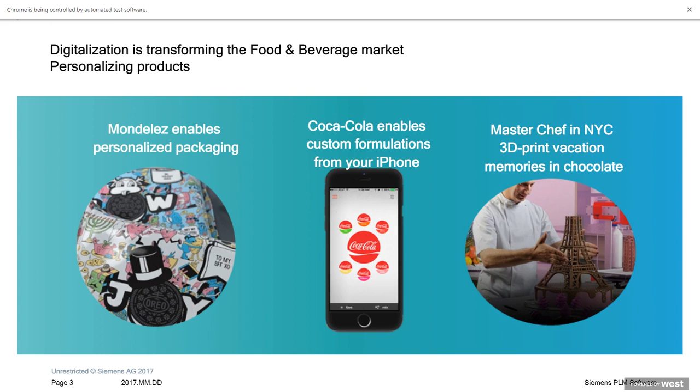And that includes the food industry. So when we look at how digitalization is transforming things, a few different examples here: personalized packaging, the Coca-Cola Freestyle app enables you to get on your smartphone and create your own flavors, and then all the way to a master chef in New York City using advanced manufacturing techniques like 3D printing to build chocolate creations for people. So you can see the digitalization trend is here. It's impacting the way our products are produced and brought to market, and you as engineers have got to accommodate that in your day-to-day lives in order to be successful.

And it's not all a positive change. According to Accenture, digitalization is the main reason that just over half the companies in the Fortune 500 have disappeared since the year 2000. If you think about that trend, that's really astounding. So half the companies are either out of business, they've been acquired, or they've dropped out of the Fortune 500 because of the impact of digitalization. And so in order to survive that disruption and really thrive in this era, there's a lot of change going on, and the change comes really fast.

We believe that incumbents need to become digital enterprises. That's more than just adopting CAD or adopting a simulation tool. That's really about taking digitalization and tying it through your entire business. So if I look at this, that starts getting into the concept of a digital twin and the digital thread.

The digital twin is basically a virtual representation of the product, and it incorporates a kind of single source of truth that you can look at, that goes all the way from the ideation stage at the very beginning of the product life cycle through into realization where you're manufacturing the product, and out into utilization where the customer is using the product out in the field.

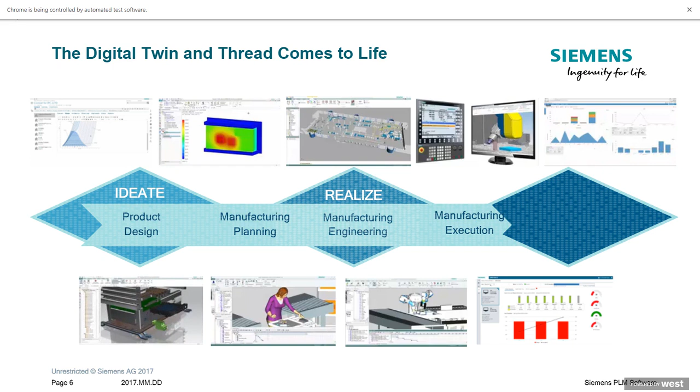And so if we can create a digital twin and tie that through the entire process, now we can do things like define product requirements digitally, build our design and simulate so that those requirements are met, then come in and build a manufacturing operation, again, on the computer. And now we can do this whole process efficiently, so when we move to the real world, we're guaranteed, or at least highly maximize the likelihood, that we're going to succeed and minimize that risk.

So how does that impact simulation then? Simulation is part of that digital thread, or ties into the digital thread, and we talk about it in the frame of predictive engineering analytics. So predictive engineering analytics, when I talk about that, it's really taking any kind of simulation data, so whether it's 1D system simulation or 3D, like structural, thermal, acoustic, that kind of simulation, or CFD, and/or test data.

I can take all of the data that's available to me and now use that in an integrated way to provide a performance prediction for my product. So now in a requirements-driven systems engineering process, I can ensure that my requirements are met before the product is ever built. And if I manage that whole thing in a PLM context, that provides the traceability, the change and configuration management required to walk through that entire digital thread, all the way from beginning to end. And as changes occur, I can reevaluate and see that my requirements are still met as I move through that process.

So you can see that simulation is not just about building a model and looking at a stress field and seeing that the stress is okay. It really should be used in this context, in this day and age, in a much more strategic way.

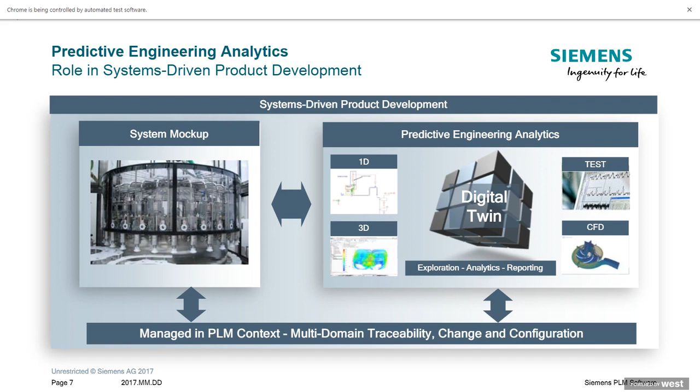And we talk about that, again, in terms of predictive engineering analytics, and our next generation tool set is built around providing that capability. And if we implement that, then what are we doing? What are the benefits of simulation?

As we implement that, we're driving innovation, right? We can explore a much wider range of ideas, look at the feasibility of those ideas really quickly before we ever build a physical part. And then because we're doing that in the virtual world, we're saving time, we're streamlining the process overall.

So now we also reduce cost and we improve quality in the end. So the impact to the business is huge. And I think as this change comes at us at a really increasing pace, we're going to need those benefits in order to effectively engineer our products.

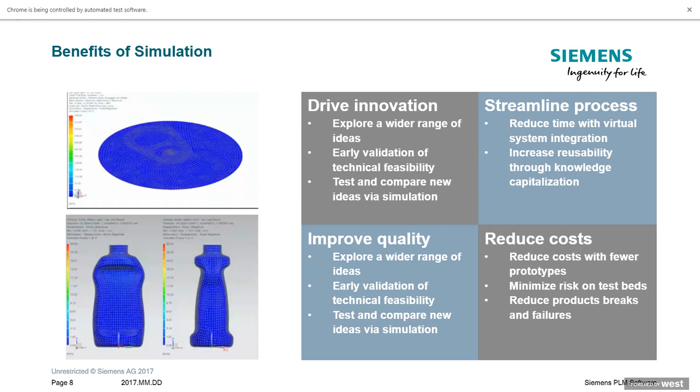So with that brief introduction, I want to turn it over to Ravi. Ravi's going to go into a little more detail about the use of simulation and some case studies, and then I'll pick it up at the end with one more example and a conclusion. Ravi? Yes, thank you, Tom.

So as you listen to Tom, he very well explained what is the role of digitalization and what does a digital twin mean. However, he also explained that a digital twin may have various different aspects of it, and the one important aspect that we are going to look at today is the simulation aspect. So be it one-dimensional, three-dimensional, everything that is physics-based. And what I am going to try to do is essentially go through a few examples and case studies and show you how this helps you do your engineering in a much better fashion.

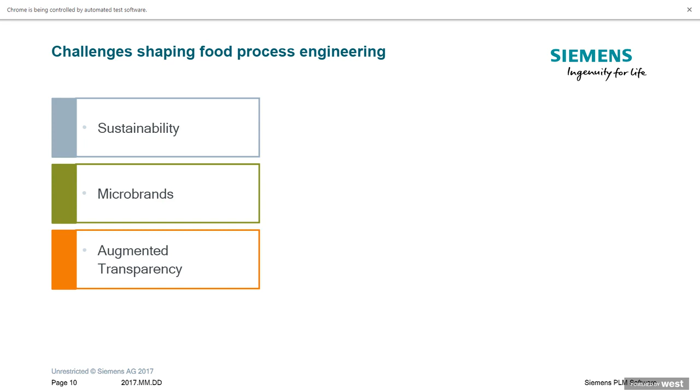But before we go there, we of course have to look at what are the challenges that are shaping food process engineering. Sustainability, a lot of small brands that are coming up, demand from consumers regarding augmented transparency, as well as a digital foodscape. These are some of the trends reported by leading food engineering magazines. And some of them are extremely important. For example, sustainability, precise source and choice of the ingredients, consumers are demanding that, and that means there are changes to the traditional production processes.

The micro brands, they are always coming out with innovative products, which means that you need to have a shortened time to market by doing a faster scale-up from anything that is invented in the lab, taking it to production. Similarly, taste, texture, quality, safety, shelf life, all of these are quite important in the way the final product turns out, as well as some other aspects such as packaging and customer experience. How will, for example, a ketchup that I'm dispensing feel while I'm doing that?

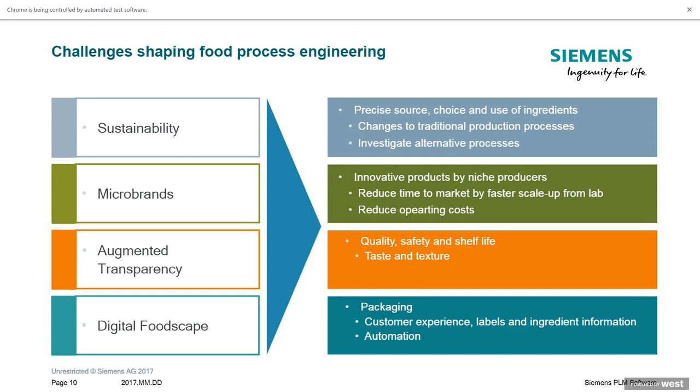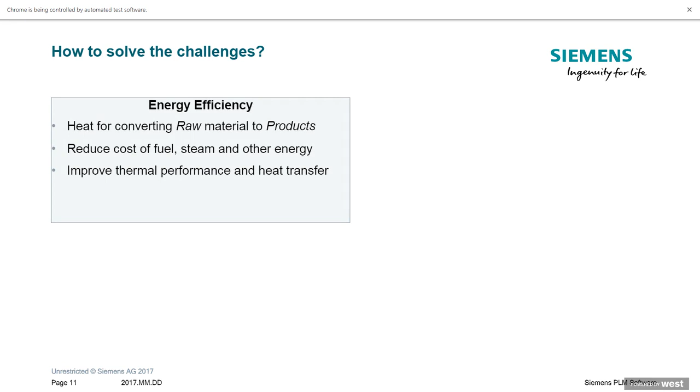And so if we look at these challenges, there are a few ways that one can look at solving these challenges, and a lot of them are related to that aspect of digital twin, which is the manufacturing or the realization or the processing of these. So if you look at things like energy efficiency, simulation provides insightful thermal performance evaluation and conjugate heat transfer.

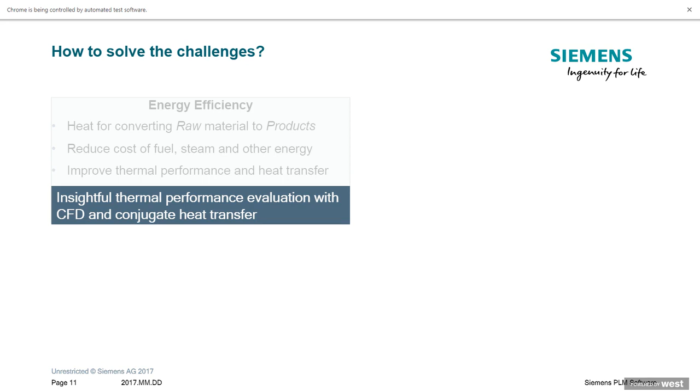If you look at the innovation efficiency, which is essentially how can I bring a new food product to the market quickly, one has to look at how virtual prototyping at lab or pilot or production scale can be used to ascertain scale-up criteria.

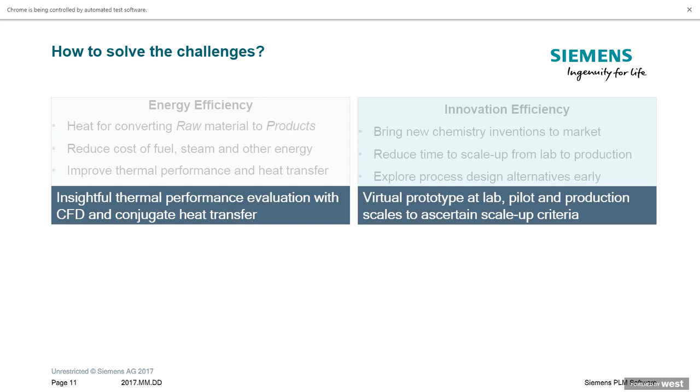Similarly, process efficiency. Everyone, of course, when talks about reducing the raw material per unit product, as well as the waste that is produced per unit product. So lowering cost and achieving process efficiency in many of these classic unit operations in food process engineering, such as mixing, reaction, mass transport—these are some of the important aspects there.

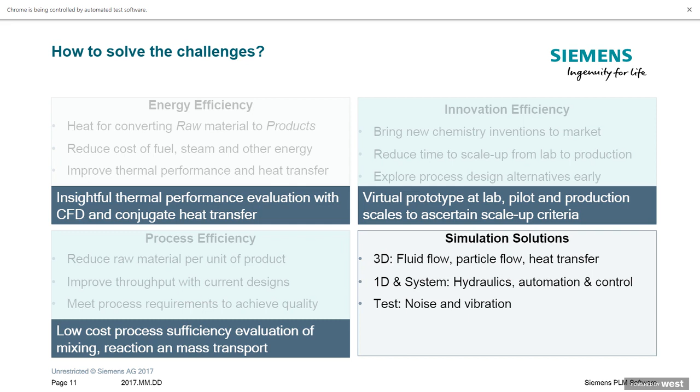So what we talk about today is three-dimensional, one-dimensional, and including test as some of the aspects that build that digital twin. When we talk about digital twin, essentially what we are trying to do is take that physical representation and convert it into a digital representation, which includes the geometry, the physics, the boundaries involved, the material behavior, the process behavior, and so forth.

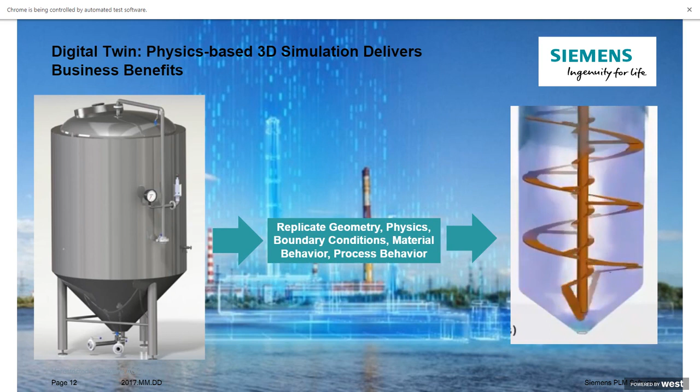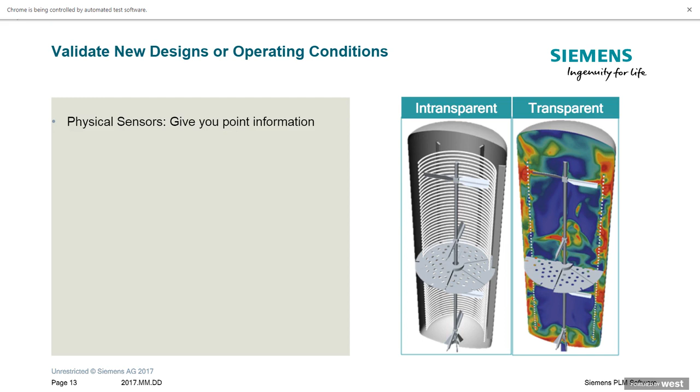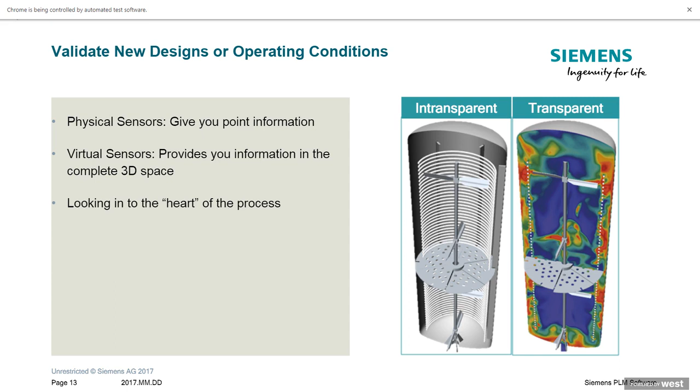The key question we always ask is, why do we need to do this? Where does it benefit me? If you take any process, for example mixing in fermentation or any other process step, what you look at in physical reality is very intransparent. You may have some probes and sensors that give you point information at a few locations. But a 3D simulation, a CFD simulation, helps you make that process very transparent, providing information in a complete 3D space. It's like you can look into the heart of that process, and this information is the powerful tool you can use to improve your processes.

These can be applied at various different stages. People use that to either validate a particular design, to see whether it will work the way it's supposed to, or to troubleshoot something already designed but not working to the efficiency expected. Or the third stage is having predictive capability, so before you design, can you predict what would happen if you wanted to increase the capacity of a process, or change temperature, and what would be the effect on overall process behavior.

And then eventually you can also think about automating that simulation process so you can explore all various possibilities, both in terms of the design of the process and the operating conditions, which are a crucial part of process engineering.

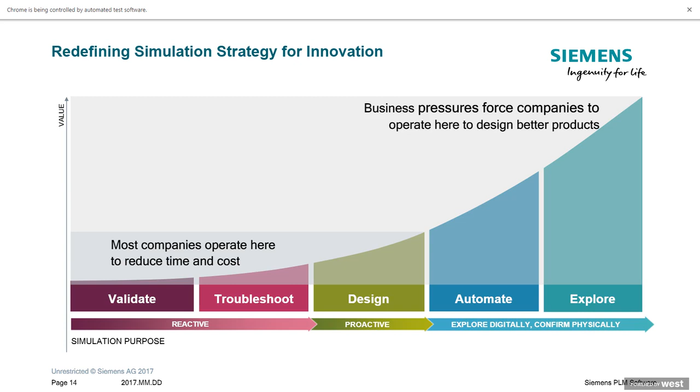For those not familiar with how computational fluid dynamics, or CFD, works, I've put together a couple of slides to explain it simply. In our engineering courses we always learned that mass, energy, and momentum are conserved. In CFD simulation, we essentially take these fundamental mass, momentum, and energy balances over a given control volume, using a discretized space, and solve them numerically instead of analytically or by hand, because now you're solving many equations.

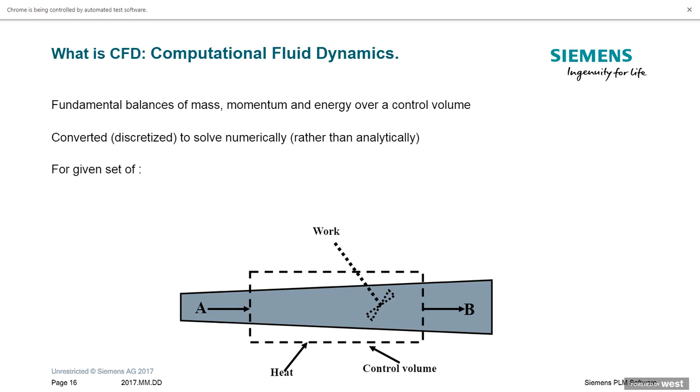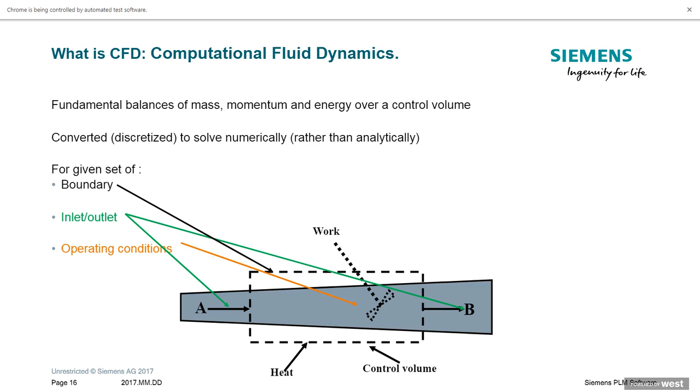But there are, of course, always constraints in terms of the boundary involved. There are always inlet and outlet conditions, for example flow rates or heat being input to a system, as well as operating conditions, which could be the rate at which a mixing tank is stirred, or the rate at which you're adding a coolant or heating fluid through a system, and so forth.

Once we've defined this system, we take that geometry and discretize it, which is called the mesh. We set up all the required physics models, meaning mass, momentum, energy balances. We define those inlet and boundary conditions, and then let those equations solve. At the end, what we get is a complete 3D picture of what goes on inside.

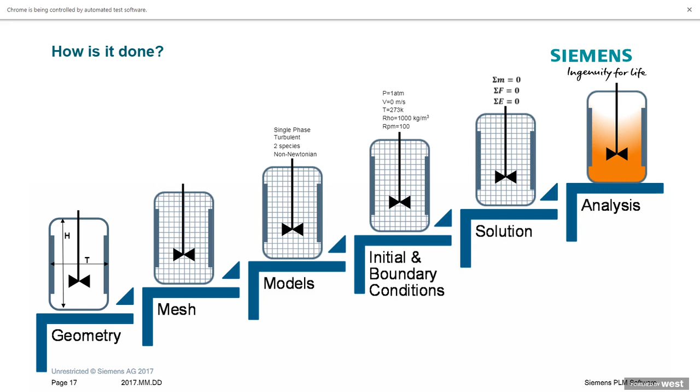Once that's done, we perform analysis to evaluate all the variables of concern, which could be concentrations and mass fractions or mole fractions of various species. If there are any particles involved, we can look at how these particles move through the system. A lot of the time turbulence and mixing are important. Food products could be shear sensitive, and you might be concerned about too much shear, or too little shear not being sufficient for the process looked at.

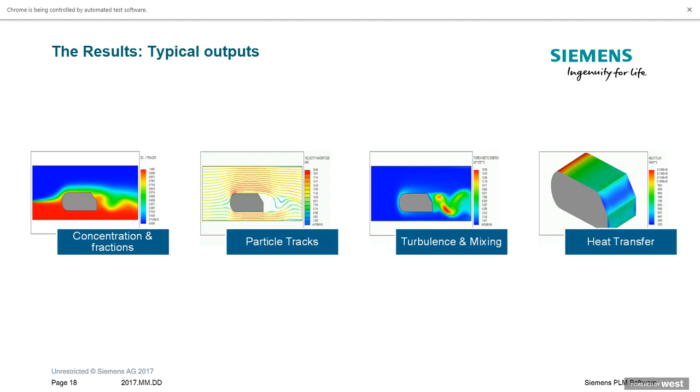Many food processing operations involve some sort of heat transfer at a given point, and too little or too much heat transfer can always mean a compromised quality of the product produced. So once we've looked at the fundamentals of how computational fluid dynamics and particle flows work, let's take a look at a few application areas and examples.

Some of the application areas I want to talk about are mentioned here briefly, and the examples later will be in more detail. For example, any general flow through process systems where you're looking at uniformity of a product, assuring even distribution, even achieving reduction in pressure losses - these are very common occurrences.

We also see many cases where you want to explore various designs through a rapid virtual prototyping sort of system. This animation shows various designs of a cyclone separator that we explored. The reason is that we want to increase the efficiency of the cyclone separator but at the same time minimize the pressure loss and thus the operating cost.

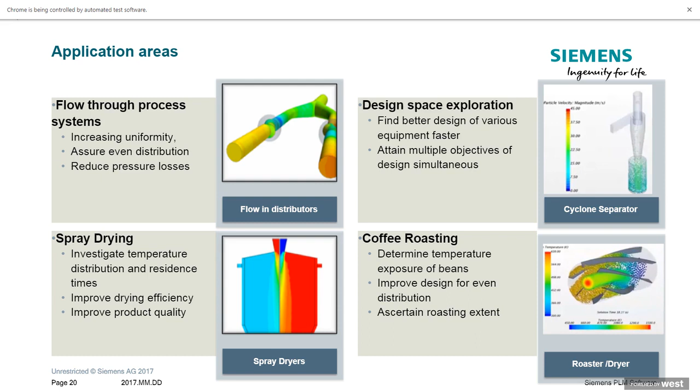Similarly, some specific things such as spray drying, or not just coffee roasting but roasting of many other food materials, are some of the important application areas.

Mixing is also very common. Any food processing will always involve more than one ingredient that you put into a tank, and then it needs to be mixed in the shortest possible time in the best possible manner. This process can consume a lot of power. Uniformity of the blend plays a big role, and reducing pressure losses through the system can also be important. So mixing forms a very broad application area in this example.

A lot of the fluid flows and solid flows in food processing can have very non-Newtonian behavior, highly viscous fluids or fluids with elastic properties and so forth. So CFD simulation allows you to look in detail at how these processes behave.

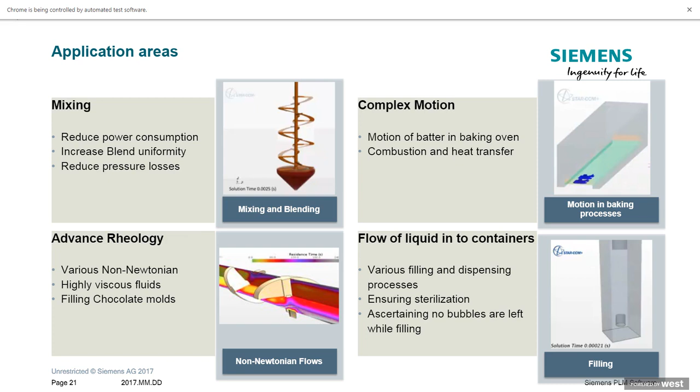Some of the other things we can look at are related to packaging. Once you have your product in the packaging stage, there might be issues related to filling, dispensing, as well as maintaining sterilized environments. Let's take a look at a few of those in more detail, and talk about some success stories and examples.

The first one we're talking about here is related to spray drying. We all know spray drying is very commonly used in food processing, either for milk powders or coffee powders and similar food ingredients. The way the spray dryer works is you inject a liquid spray, and as it flows down a vessel maintained at high temperatures, the liquid evaporates, and you get powder at the bottom of the vessel, which then needs to be separated using cyclone separators.

Some requirements in this process are related to the residence time of the particles required to achieve the desired dried product moisture level, as well as the temperature to which they are exposed.

Many questions always come up, such as what happens if I change the feed composition, or if I want to increase my throughput, or if I change the gas temperature—will the product be of the same quality? Would I encounter burnout issues and so forth? There are other design questions, such as which atomizer would be the best one to use. So this sort of model needs to include very accurate heat transfer as well as mass transfer, and sometimes also reactions on the surface of the droplets.

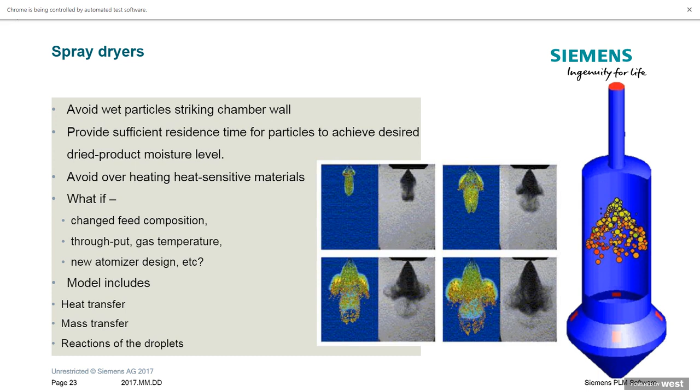Many companies have been using simulation to achieve this type of efficiency in their processes. This example shows how simulation was used to optimize the airflow and the spray injection nozzle. In the middle picture, you see the details of how the spray spreads, and on the right, the simulation results showing the temperature and residence time distribution in the dryer.

Once you know this distribution and the residence times, you can back-calculate the distribution of each particle with respect to the temperature exposure. By actively using CFD, this company has improved its understanding of this complex physics and used that in virtual prototyping. You can imagine spray dryers are large equipment, so they're not something you can easily build and test.

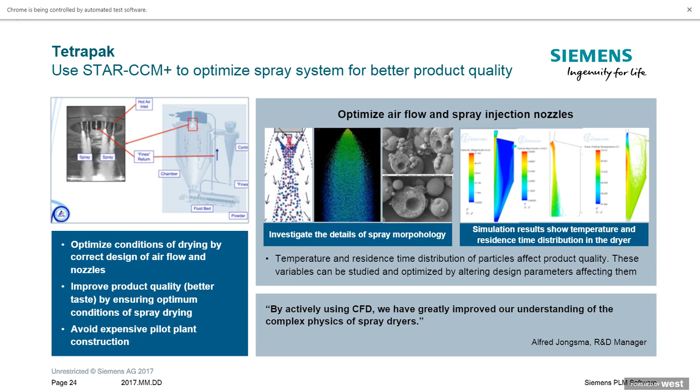I earlier talked about rheology being an important aspect. That means there are many cases where one or more liquids behave in a non-Newtonian fashion, and you look at how the flow of one or more of these liquids changes and alters the way they can be extruded out through various nozzle types, nozzle shapes, or equipment.

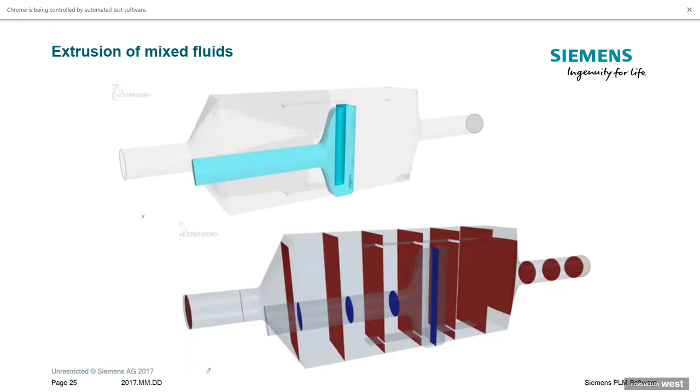For example, pasta making is a unique example where you extrude the dough through many nozzles, giving it the final shape. There are many operational considerations, such as uniform distribution to all the nozzles, no stagnant areas, and minimum energy consumption in these nozzles, which is directly related to operational cost. There are also product quality considerations, such as high shear or high temperature causing damage to the nutritional value as well as texture, taste, and color of the extruded pasta.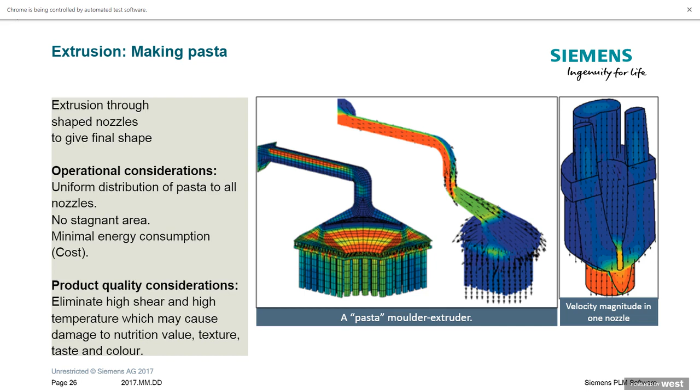So simulation gives you a very clear picture of how this process is functioning, and allows you to take the necessary engineering steps to remedy the situation if it's not optimum.

In such situations, we are dealing with materials of very extreme viscosity, even 1,000,000 times higher than that of water, and you want to assess if there can be material damage during processing. This is always coupled with heat dissipation and thermal degradation. In our simulation models, one has the capability to include all of this physics in a coherent, coupled manner, so that you can understand the complete behavior of such systems.

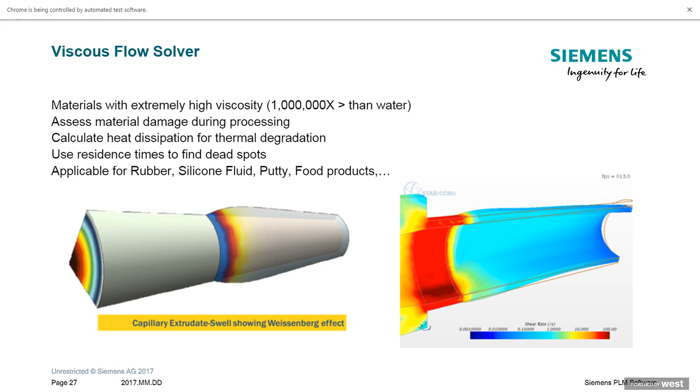In many processing applications, there are steps such as drying and refrigeration involved, be it air blast cooling or vacuum cooling, and one is always concerned about heat and moisture transfer. Here's an example from meat processing, where weight loss can occur due to moisture, and a certain moisture level is always necessary to maintain. The flow of air surrounding those food products can have a severe effect on how this moisture transfer occurs. In some other cases, it could be related to sterilization.

For example, excessive heating can degrade food quality, so temperature uniformity is important. We also have examples where you can look at the diffusion rates inside a given sterilized environment to make sure that the quantity or load of germs or bacteria that could diffuse through are below the required regulatory limits.

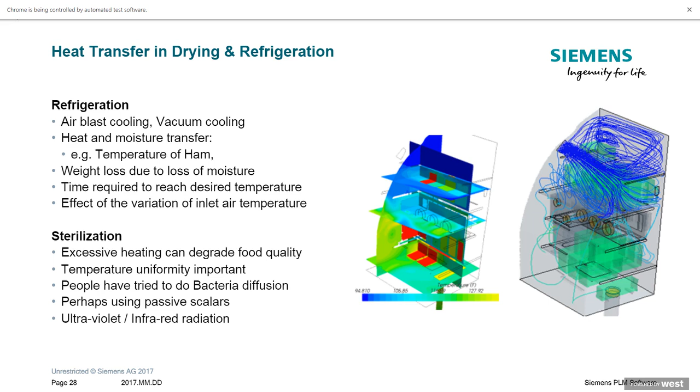Now, when we talk about food processing, there are always solid particles or solid material involved, and so we provide capabilities that can handle such complex particle flows as well.

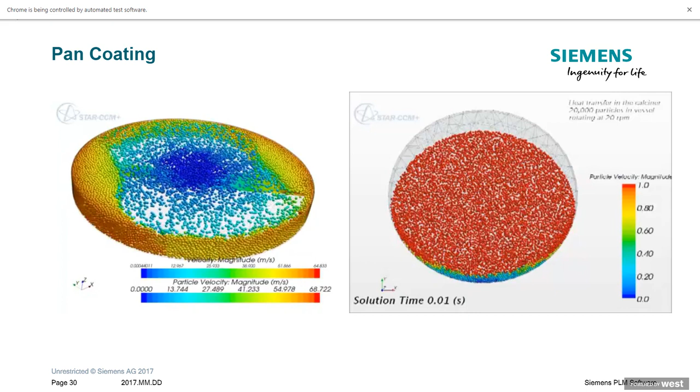Many snacks and products are coated with seasonings, sugar, caramel, or other such products. One needs to look at how the uniformity of this coating is, as well as the particles' residence and temperature exposures during those coating processes.

The discrete element modeling capability, or DEM capability, essentially allows you to model each individual particle. This particle modeling can be coupled with heat transfer as well as any spray or other material introduced into the domain.

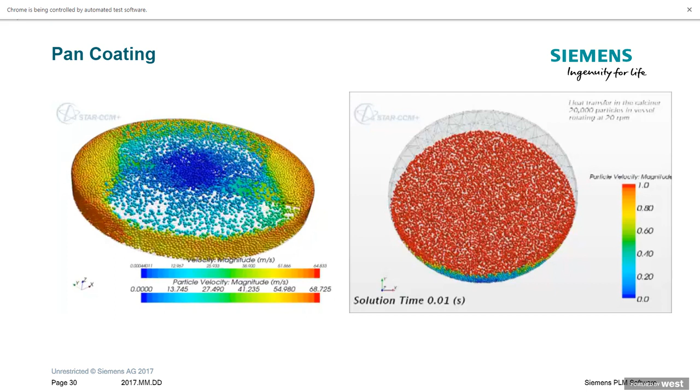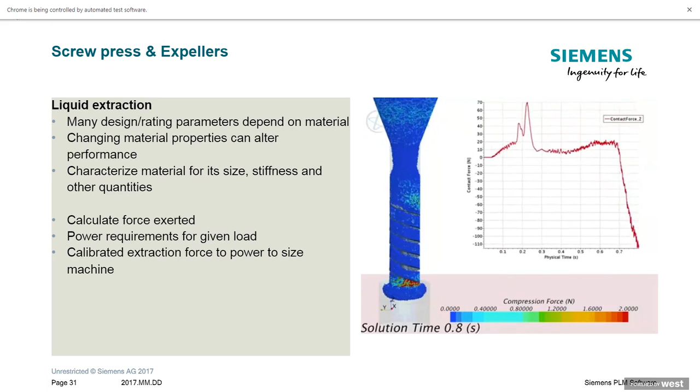We also know that many oil products produced in the food industry go through a step such as a screw press or an expeller, which means you are trying to extract liquid out from a solid particle. Many design and rating parameters essentially depend on this material.

If you have a given press, it may work well for a given type of particle, but it may not work for a different type of particle. In those cases, you need to understand how the forces exerted by this expeller press affect the overall efficiency of the liquid extraction, and how it affects the power requirements.

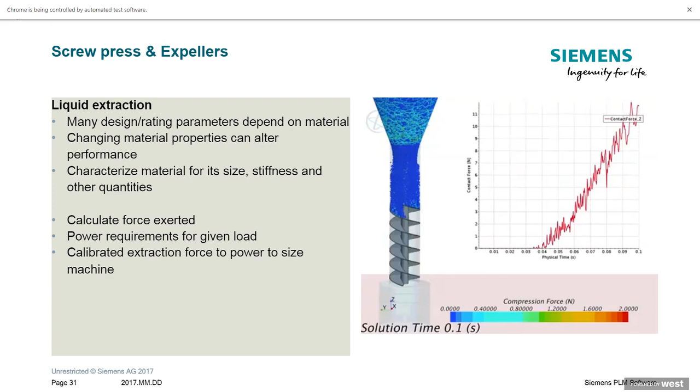Coupling the motion together with the particle flow and then analyzing the forces exerted on the particles can give you the necessary calibration and extraction force to size these types of machines correctly, or operate them correctly to achieve the efficiencies you need.

The way we achieve this is by coupling the flow of the heating media and the flow of particles together with heat transfer, which gives you a complete distribution of how each individual particle is heated. That can then help you design or operate the equipment to get that necessary uniformity.

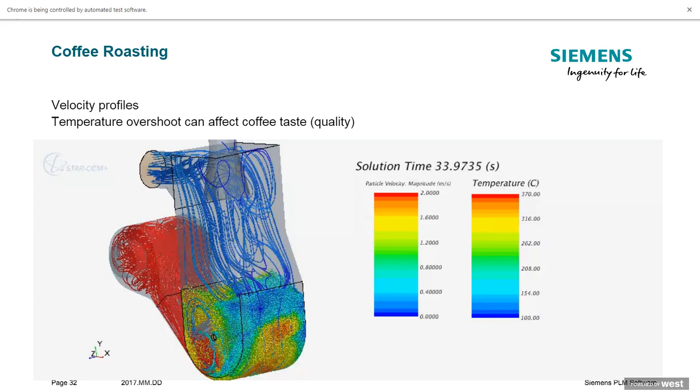I also talked about coating earlier. This is looking at coating in a very different type of equipment, where you use a rotary drum or a fluidized bed. In both cases, the principle remains essentially the same.

You have a liquid that is injected into the equipment containing the particles. The liquid is then supposed to coat those particles, and depending on the speed of rotation, the design of the equipment, any baffles used to mix the particles, and the exposure of the particles to the spray cone, all of these essentially define what quality of coating you would get.

With the help of simulation, you are essentially able to take any information or knowledge that you have, which is more qualitative based, into more quantitative based. And this quantitative basis essentially allows you to design and operate those equipment more efficiently.

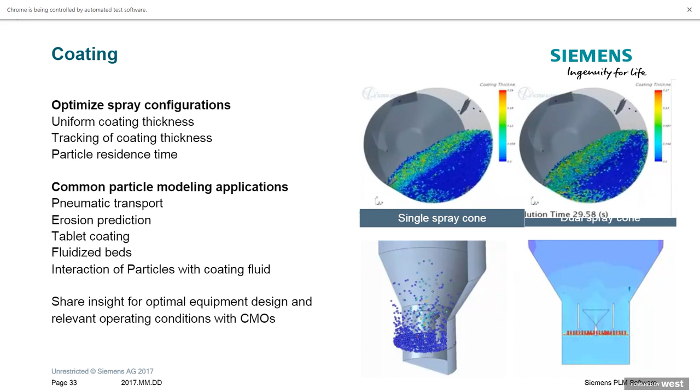Now, all food processing operations have safety as a paramount parameter, and especially when one is looking at packaging and filling, maintaining an environment that is safe and sterile is very important. So we have also looked at applying computational fluid dynamics

to filling behavior of bottles and other type of equipment as well. From a cost perspective, the speed of filling, avoiding too much foaming, and minimum consumption of inert gas are some of the design targets. But from an operation point of view, how does a certain shape of the bottle affect the filling rate, the position of the injector, the working pressure, and the duration of that injection? All of these affect whether the operation works efficiently or not.

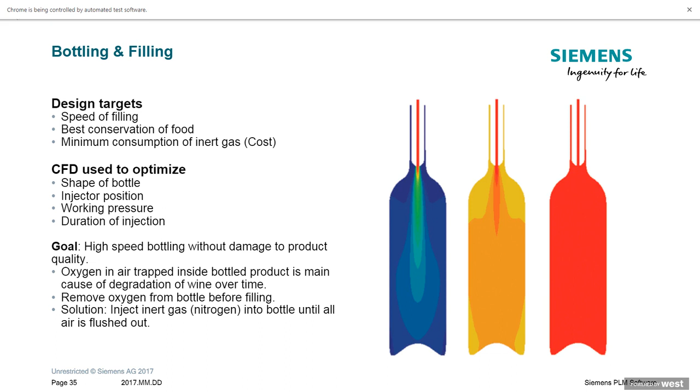So one can very accurately look at, for example, oxygen or any other gas used in the process, whether it gets trapped inside the bottle, and if that can be a cause of degradation over time, for example in wine. And then we can look at if we use an inert gas to prevent that from happening, how much and at what rate this inert gas injection should be designed and operated at.

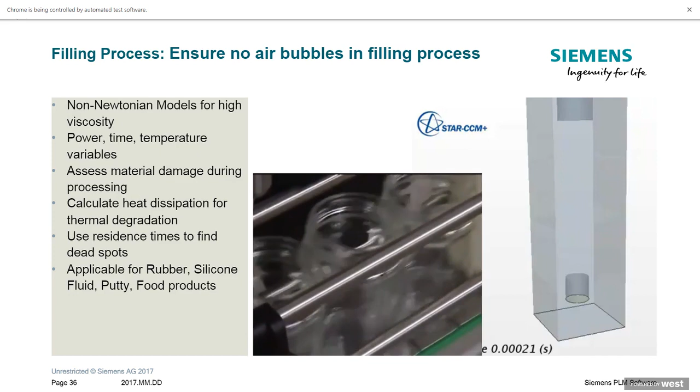Similarly, we looked at some non-Newtonian behavior earlier as well. This is an example showing the filling of a highly viscous food product, mayonnaise in this case. As the nozzle is filling that bottle, it may leave some air gaps around the corners or right below where there are curves, bends, or edges. And if there is oxygen or any other gas that gets trapped in, that can cause degradation.

So simulation helps you not only visualize but also quantify the amount of gaps that are left, and then you can use that to remedy the situation by looking at whether a different filling rate would alter that situation, or if a different nozzle would give you better performance.

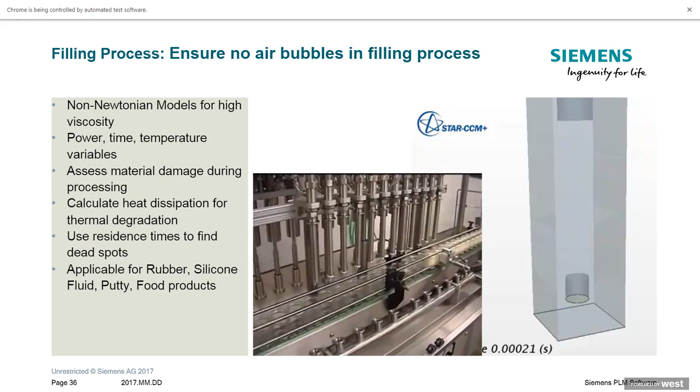I will go through just two last examples. These are very nice to look at, but they also serve a quantitative purpose. This one, if you can see it on your screen, is essentially looking at dipping of an ice cream cone in chocolate.

So that is the fun part of how nice it looks, but the quantitative part of this is essentially looking at what kind of film thickness you get on that ice cream cone, what temperatures are involved, and what the volume fraction of the chocolate dipping is.

And this may have a big consequence because, for example, if the thickness of the coated film is too thick, then it might not be a good experience for the person consuming this. Or if the film is too thin, it may break off rather quickly. So such an analysis can give you complete insight into designing this product so that it gives a very good experience to the consumer of that food product.

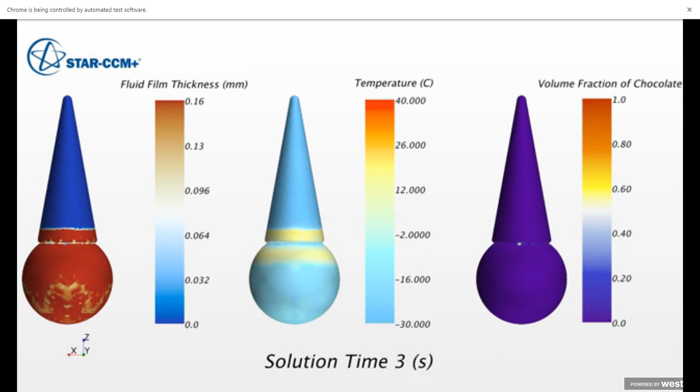So we have looked at quite a lot of examples that involved 3D simulation, which means computational fluid dynamics, as well as particle flows using discrete element modeling methods.

The Simcenter, which essentially combines all these different aspects of simulation, is summarized over a few slides here. The portion I was talking about all this time is related to CFD and DEM simulation, which includes particle flows and fluid flows, coupled with heat transfer and reactions.

And the other elements, the 3D and 1D simulation, I'm going to pass back to Tom, who is going to go through a short overview and then a few examples related to how those types of simulations can also be applied for food process engineering.

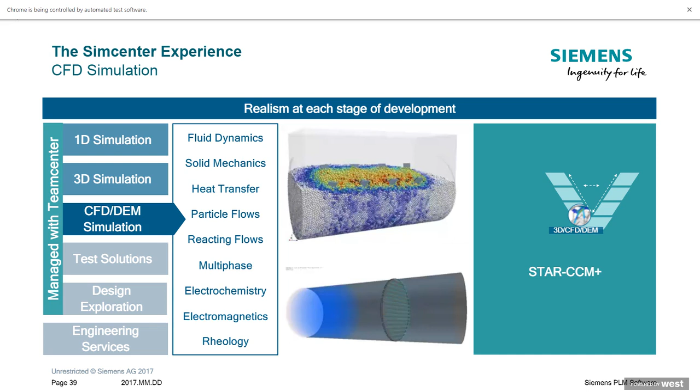Okay, thanks, Ravi. So as Ravi mentioned, we started off with a little bit of the digitalization message and then the predictive engineering analytics. Simcenter is the Siemens answer for that predictive engineering analytics. And I don't want to turn this into a product pitch, but I want to talk a little bit about...

Ravi showed examples from the CFD end. As he mentioned, that deals inherently with the flows occurring through the food processing operations. There are also all kinds of other 3D applications that we can do. I'm not going to focus there for now, but things not even related to food processing, right? It might be a food device, like acoustics on a blender.

One of the number one complaints on a blender by consumers is how much noise it generates. And it's not even how much noise necessarily. If any of you are old enough to remember the old-timey blackboard, your fingernails going down it may not be that loud, but the sound quality is really terrible.

So it's not only acoustics, but sound quality, which you can simulate as well. But then from a 3D end, you can do things like structural, the dynamics, all those kind of things. I had an animation earlier that showed a top load of a bottle, and also a can opening, those kind of things.

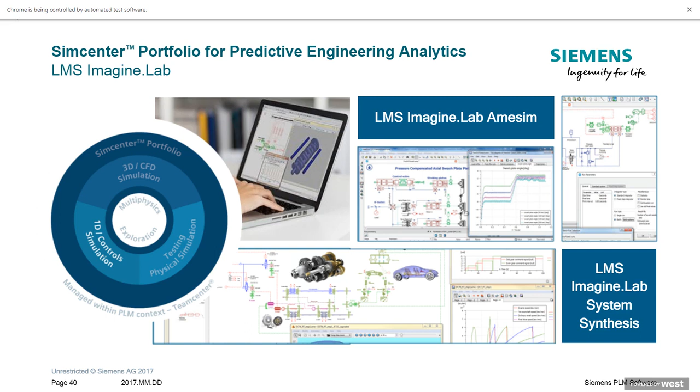1D, on the other hand, is a system level simulation, or lumped parameter kind of simulation. What we can do is model a whole system in its entirety. This is typically multi-domain and involves a lot of interacting components that could be mechanical, electrical, hydraulic, all those kind of things. And now we can innovate way in advance of having CAD available, by putting models together of the whole system, including the controls piece. So anybody involved in designing controls can write the controls in Simulink or whatever you might use, marry that to a 1D system model, and now look at how the whole system performs together.

So I think of this kind of tool almost like a multi-physics GUI. Very easy to use, very simple to use. In this case we've got libraries of things like hydraulic components, pneumatic components, thermal libraries, electrical libraries, mechanical libraries. So if I wanted to build a hydraulic system, I would just go into that library and drag and drop a pump, a line, a valve, and maybe a tank. I quickly build up my hydraulic system, input parameters relating to those components, and now all the physics are baked in.

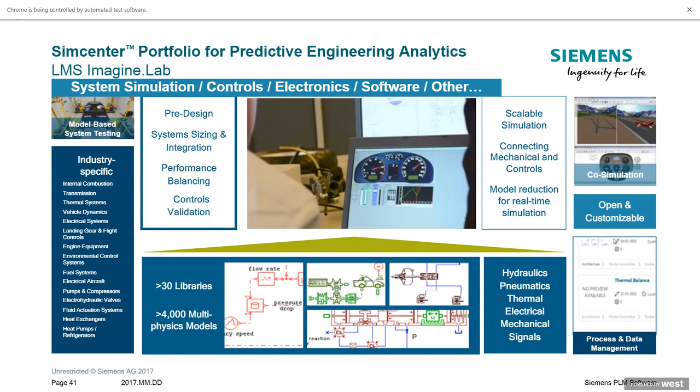So now, as I indicated, I can look at all kinds of things about the system and really do a lot of innovative explorations. This is one - we saw the example that Ravi put up of the mayonnaise being filled. The focus in that problem was on the fluid and how it filled the container, so you're using CFD for that.

In this case, Ronchi Mario, they make the machines that do the filling, and they need to be able to design those very efficiently, especially when their customers have all kinds of different container shapes and sizes. So they're in the business of designing these customized filling machines. What they typically had done previous to using simulation was almost like a make and break approach, where they make a prototype, run it through its paces, it doesn't meet the design requirements, so they tweak the prototype, remake it, try it again - very time consuming, very slow, and you're limited as to the number of things you can try.

In this case now, once they were using simulation, they're able to build the whole system - the mechanical components that are moving, the hydraulic system, the whole thing together with the control algorithms. And now they're able to go through and make sure you're looking at things like throughput, fill quality, how much time it takes to fill. Fill quality in this case would be more concerned with maintaining a fixed pressure drop, so you get a given volume of fluid in a given period of time. But you're able to go through and look at energy efficiency, and all the things that impact that design. And now they credited that with reducing the number of prototypes by more than 20%.

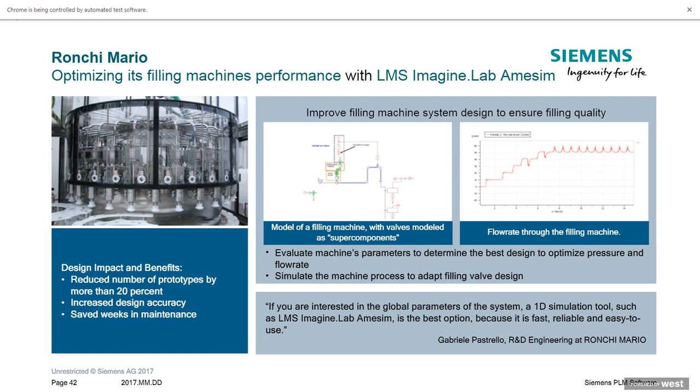So I'm gonna wrap up then. We've talked about the impact of digitalization, and it's really real in the food industry. You really need to think about using simulation, if you're not today, in a very strategic way for the organization. It should be part of the engineering process, and it delivers real design impact. It makes things more innovative, lower cost, better performing, and really drives excellence in the product development process.

So with that, Deborah, I'll turn it back over to you, maybe for some questions.